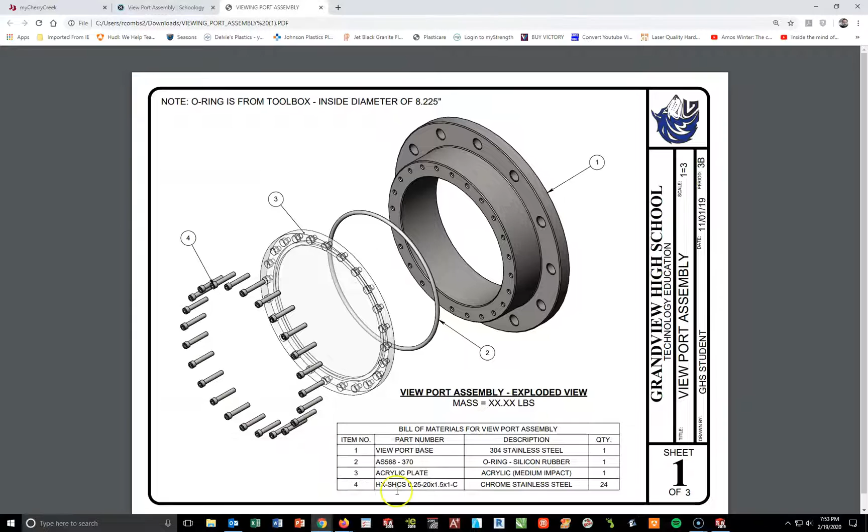Now the size of this, according to our drawing, is going to be 1/4, so I'll show that here. I look down here into this part right here, so it's 0.25 is 1/4-20. It's going to be 1.5 inches long with 1 inch of threading. The C is for our cosmetic thread.

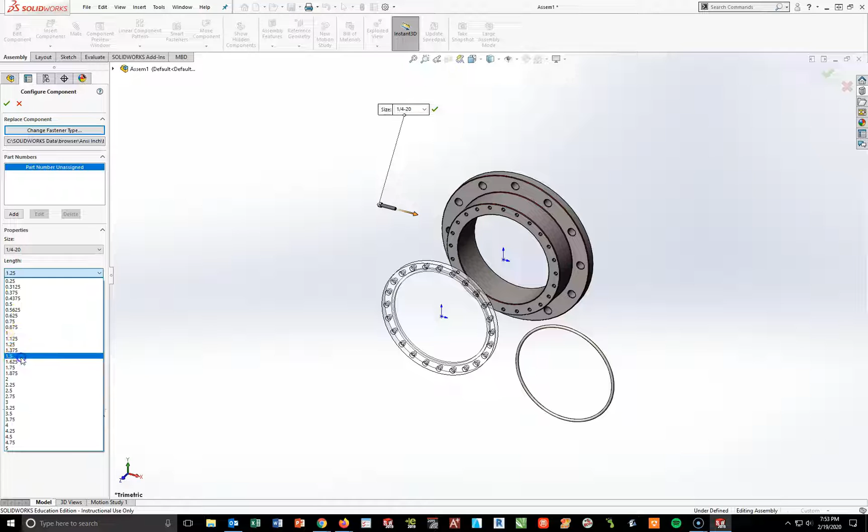Okay, so I'm going to go back to SOLIDWORKS. I'm going to do 1/4-20 by 1.5 inches long, and the thread length will be 1 inch long, and I'm going to use cosmetic threading. All cosmetic threading does is make it look like it is a screw.

At this point, I'm going to hit my check mark and call it good, then hit escape. I'm not bringing 24 of these in—we're going to pattern this in just a second. I'm going to show you what's called component patterning. Do not bring in 24 and have to do 48 different mates; you're going to make a mistake somewhere.

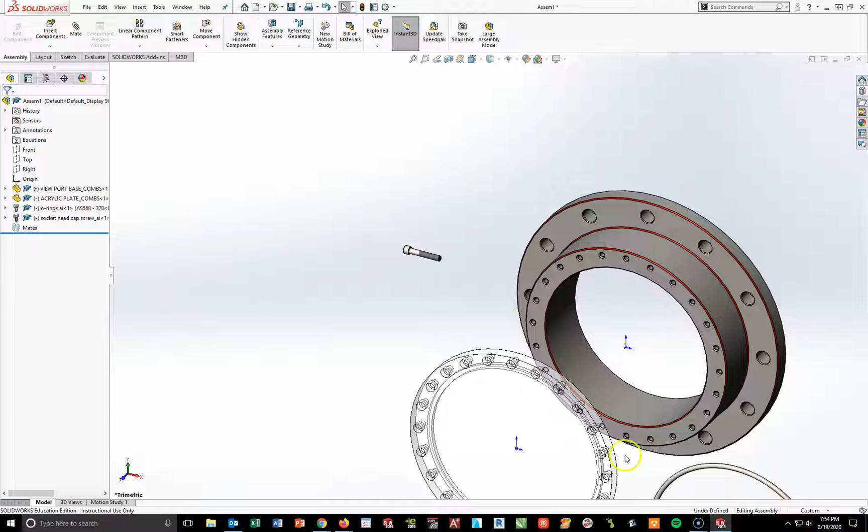Now what I want to do is start getting this mated together. To do this, I've got a couple things I need to get to work here. I'm going to try my mate. I'll hit my O-ring and go ahead and hit the inside of this channel, and what it's going to give me is a tangent mate, which is fine.

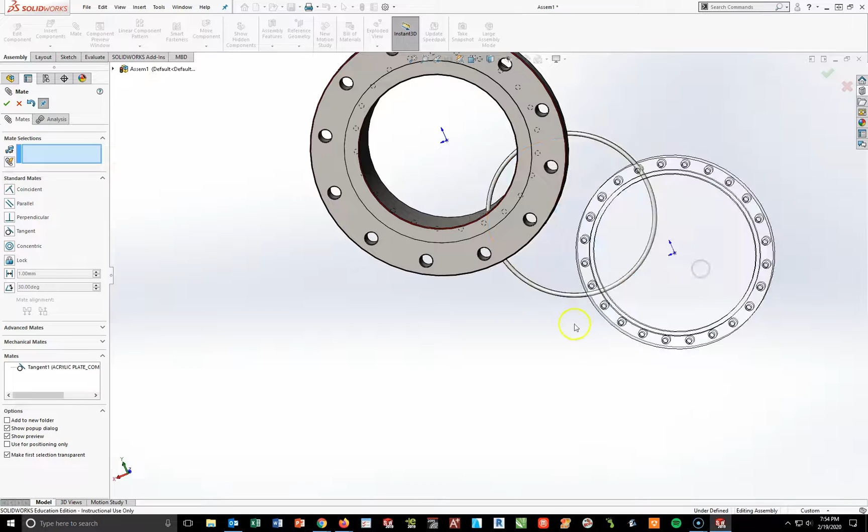I can try either way, it doesn't matter. I'm going to go this way, and that gets it at least to where it's sitting in that pocket. But the problem now is it's still not quite in the right spot. I could try to eyeball it in there, but if I move anything, it's not going to get there.

Okay, so I've got to actually mate this with planes. If you look carefully, this is sitting in the channel, and that's great, but the problem I have is I've got to get this in the right position. So I'm going to have to use my planes with my flyout menu here.

I'm going to go to the acrylic plate and expand it, and take the top plane of the acrylic plate here. I'm going to go to the O-ring and expand it, and take the top plane—in this case, not. I'm going to take the front plane and lock those two together. So now at least it's sitting centered. I'm going to hit my check mark.

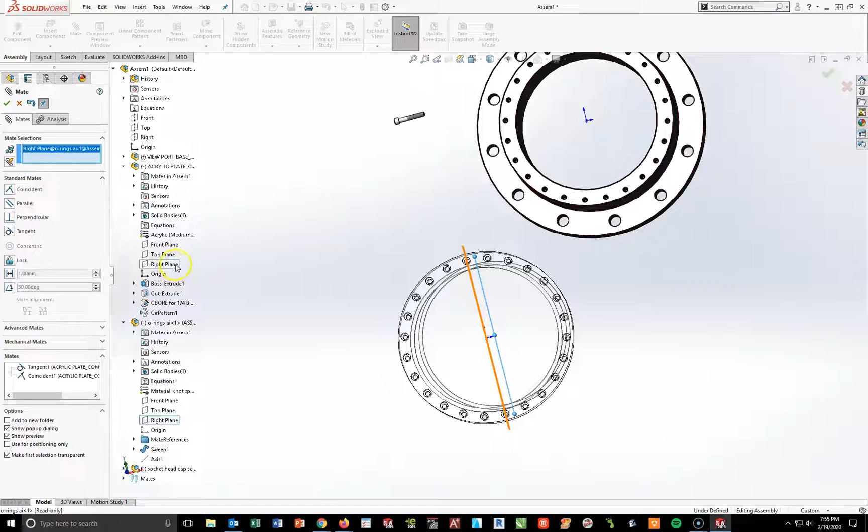And then I'm going to take the right plane of my O-ring and my acrylic plate. I'm going to find a matching plane, in this case my right plane of my acrylic plate. And now I have this perfectly set inside. So now my O-ring is sitting perfectly in that groove—at least I think it is. Maybe it's not, I can't tell which way. Yeah, it is, it's sitting right in that groove, right where it's supposed to be.

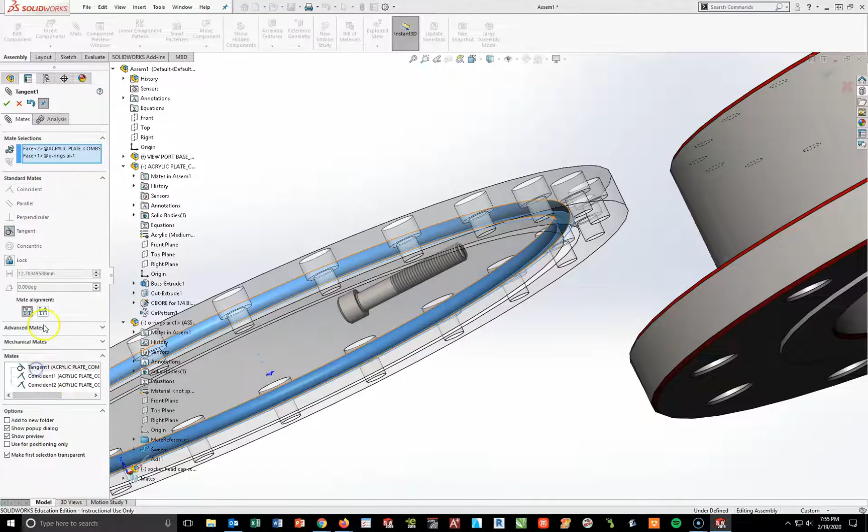Actually, it's not, I'm on the wrong side. So I'm going to go back to this tangent real quick and flip that over. Is that in the right position? There we go, so I went back and did the alignment here. Now it should be sitting in the right position, which is in that groove right there. This is why it's hard to work with acrylic, because it's hard to see where this is actually sitting.

Now, one of the things I want to tell you is if you go back to the drawing, we still have to add material to this, because this O-ring right now is silicone rubber. But if you go back to SOLIDWORKS and look at the O-ring over here to your left, there is no material on it. Now you need to change this, because this will throw your mass off. Same with our socket head cap screw—it's chrome stainless steel. If you don't add material on here, it will change this significantly by a pound or two.

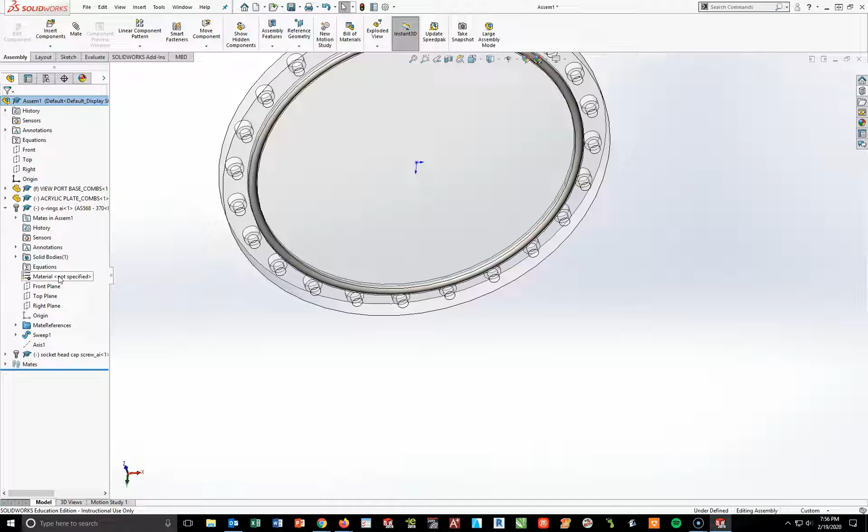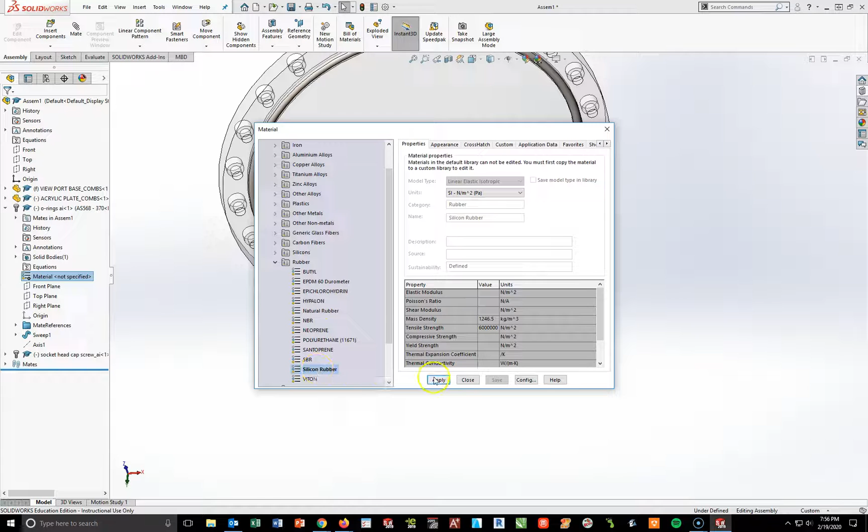So I'm going to go in here to Material Not Specified and right click, Edit Material. Now in this case, silicon is under Rubber, and it's silicon rubber. Okay, right there—apply and close. So it turns more like a black. Looks good. All right, now with that, I'm going to go ahead and close this.

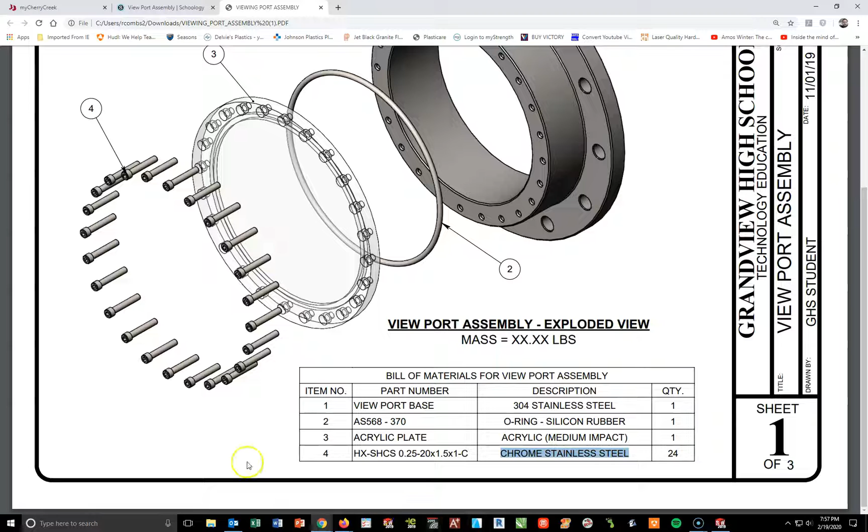I'm going to open up my socket head cap screw, because if you look again at the drawing—and again, this is commonly forgotten about—we are given this material of chrome stainless steel, so we have to add that on there. So I've got to go back into SOLIDWORKS here, expand this out, and where it says Material Not Specified, right click, Edit Material, go to my steel, and we're looking for chrome stainless steel. Apply and close.

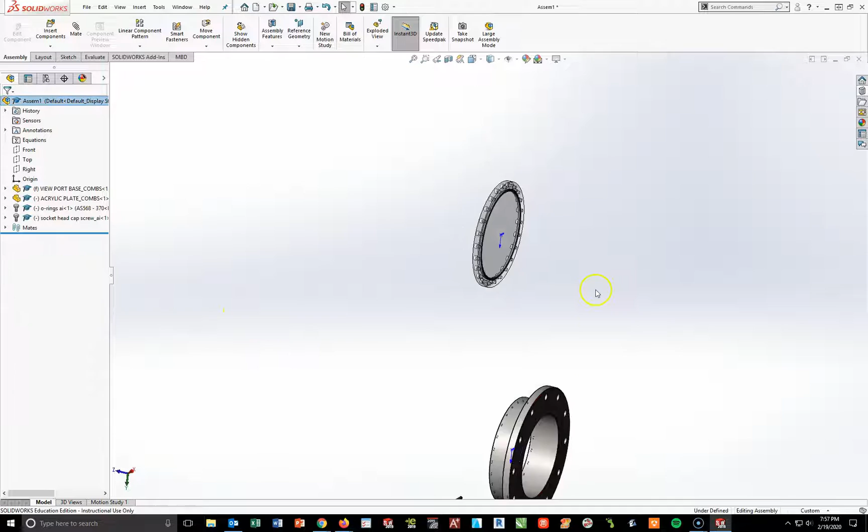Okay, now at this point I have all my pieces in place. What I'm going to do now is start lining up my holes. I'm going to take my mate tool, take the inside of that hole there, and line it up to the inside of this hole here. That gives me that part.

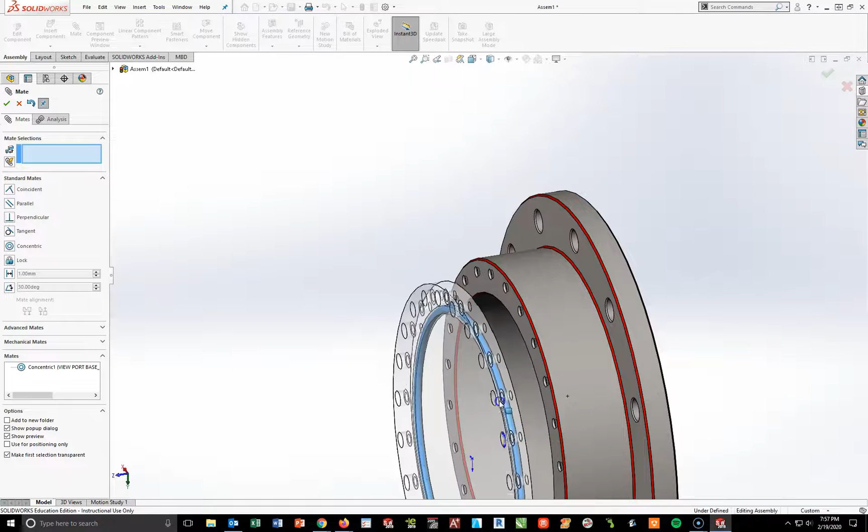Now this is kind of the hard part to play with. You got to see that's rotating around. So what I'm going to do next, and really I guess I could do this correctly, I don't know if I can make this work or not. Maybe I'll take that edge there and this edge here and make them concentric. That may actually be the faster way to go, because now, yep, everything's lined up.

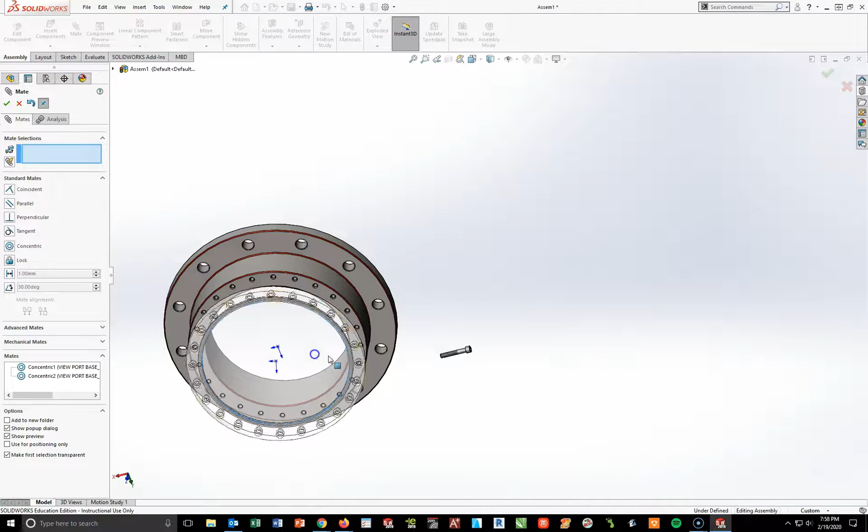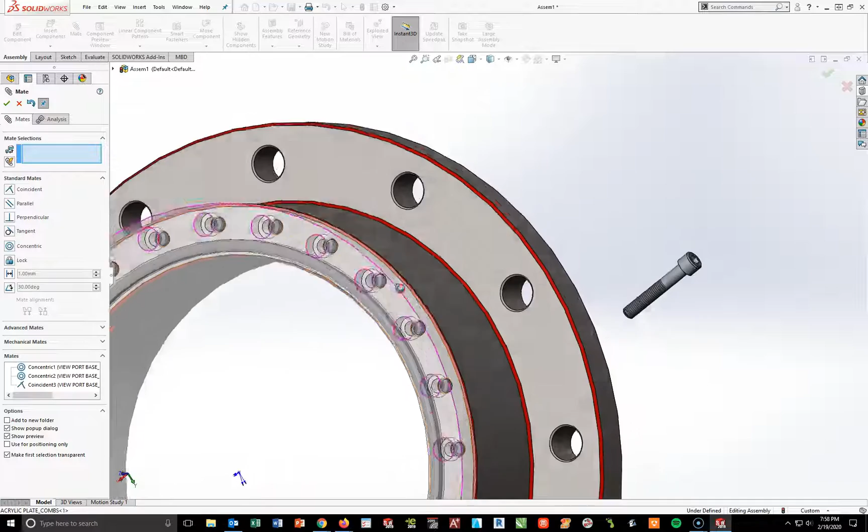Now what I'm going to do, and this is the hard piece, is trying to get this face right there. This is why sometimes acrylic's really hard, and sometimes I'll go back and change the material to a darker color so I can see it. At this point, I'm going to hit this face here, and now my acrylic plate is pressed up against the metal with the O-ring squeezed in between. So now hopefully it won't leak water.

Okay, from here all I'm going to do is go into my isometric view. I'm going to take this shaft of this screw and throw it inside the inside of that hole there. Oh, actually hit the face - see, that's the unfortunate part. So undo that. I'm going to take that right there and actually go inside that hole there. Okay, and I'm going to flip this by flipping that around.

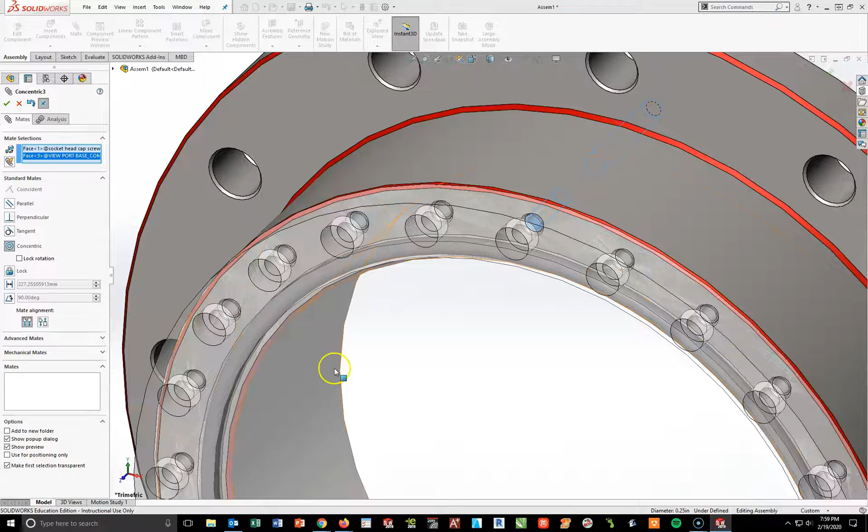Actually, I'm going to undo that one more time. I don't like that. So I'm going to go one more time here, and see if I can get this to line up in one of these spots. All right, I guess I'll go there.

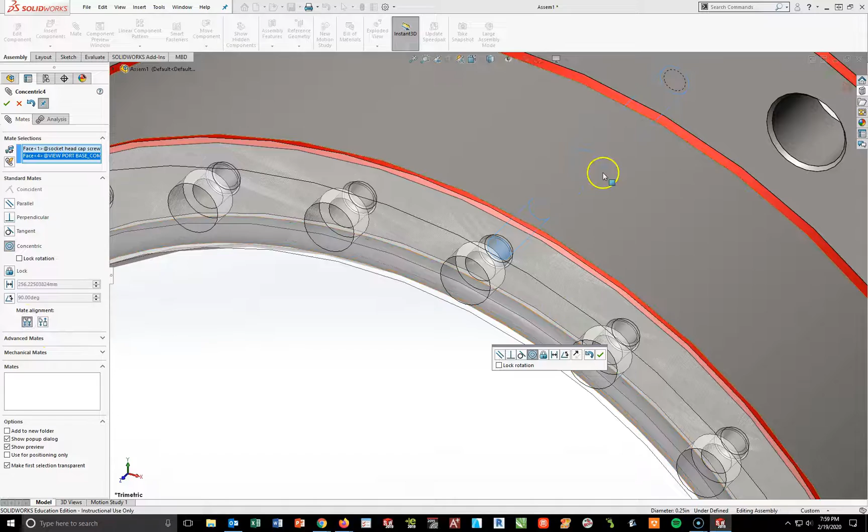Okay, and then I'm going to flip it, and then I'm going to have to somehow reach inside there. And this is the problem. There we go. I'm going to have to drag - let's go ahead and check mark this - but I'm going to have to drag this out the back. Sorry. Okay, now that's almost done.

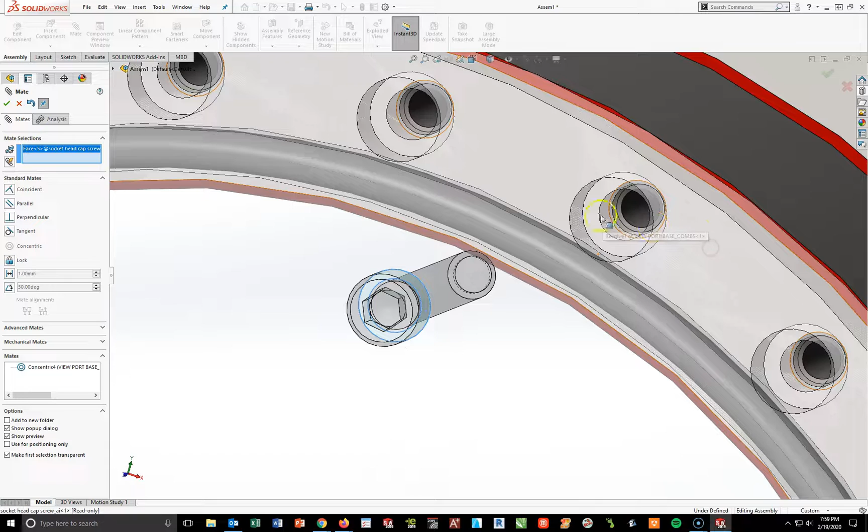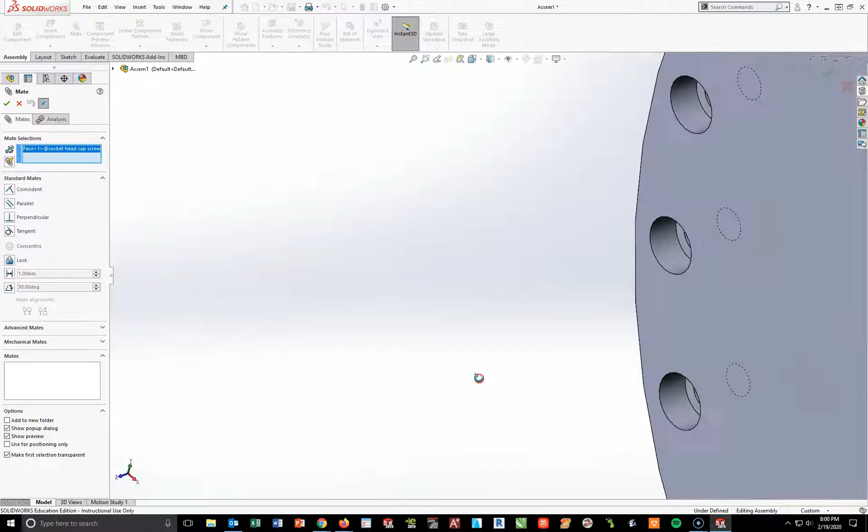Now here's the hard part. I need this face right here to be flush with the bottom of this face. Now this is where it gets hard, because in this case right now it won't work. So what I'm going to have to do is go to my acrylic plate for a second, right click and say remove material just for a second here. I'm going to make it dark so it's not see-through. And now I'm going to come back and mate this with this face here and that bottom face right there.

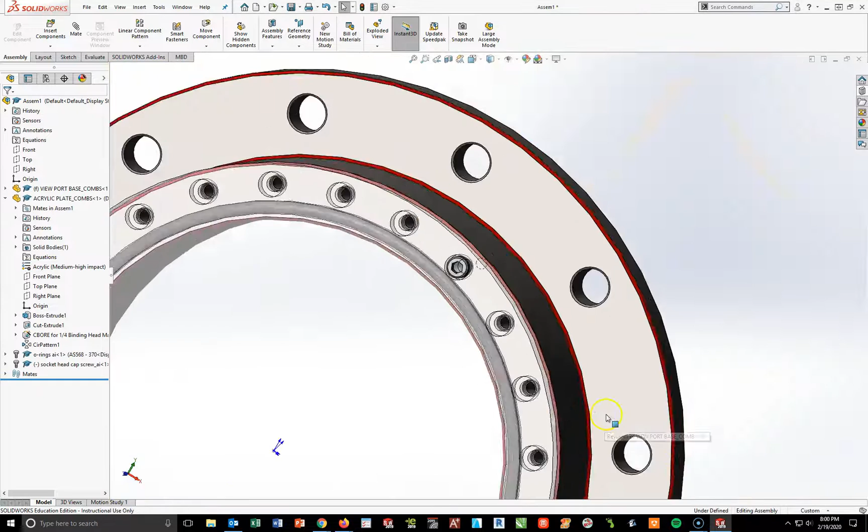So now I've got my screw in there. Check mark - I only need one, but I'm going to come back to my acrylic plate now, right click and edit. We're going to go back to plastics, and I'm going to put the acrylic back on, apply and close. Sometimes you have to take the material off to make this work.

Okay, so I've got this one in here, but I need 24 of these. And I don't want to play the game of having to mate them twice, for 24 times 2, 48 total mates. So what I'm going to do instead is go to linear component pattern under my assembly tab - we are going to do a circular component pattern instead. Now to make this work I have to have an axis, so I got to come back to the magic eye here and turn on my temporary axes. I'm going to highlight this first box and pick that axis in the middle. Now I want 360 degrees, equal spacing, and I'd like 24 of these screws.

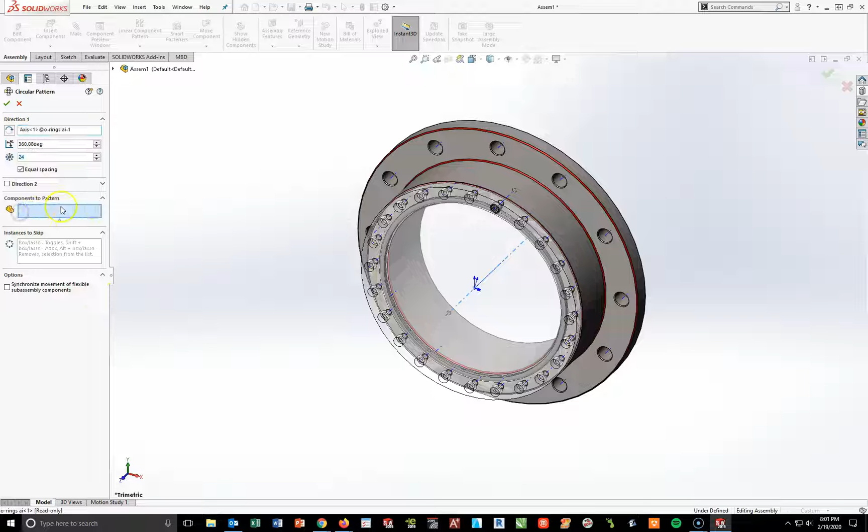So the component I want to pattern is simply this screw right here. You'll see there are 24 screws in the hole. Hit your check mark, and now you've got everything you need to have this as a finished assembly.

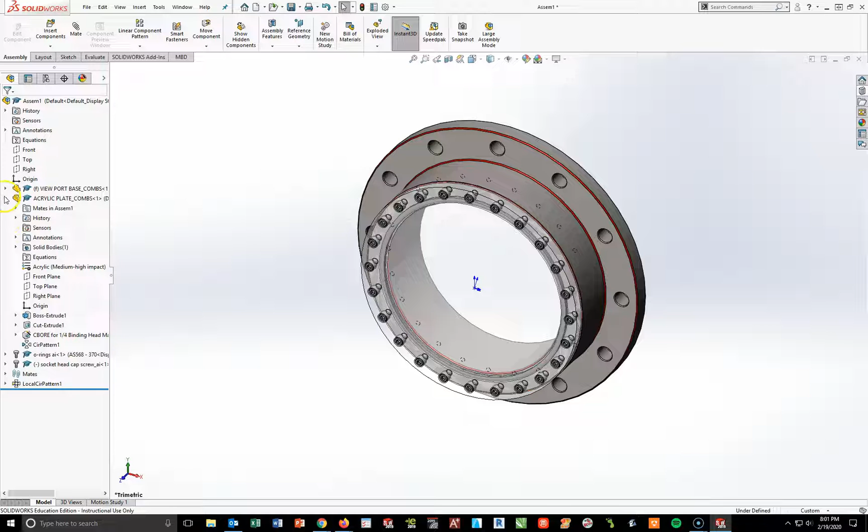I'm going to come back to the magic eye, turn off my temporary axes, and do a file save as. I'll call this my viewport, final viewport assembly, underscore my last name, and hit save.

Save all. Now if it's asking about the components, usually your screw, I'll do a save as, and just save it in the same spot as all my other pieces, so they're always together. I'll just hit save.

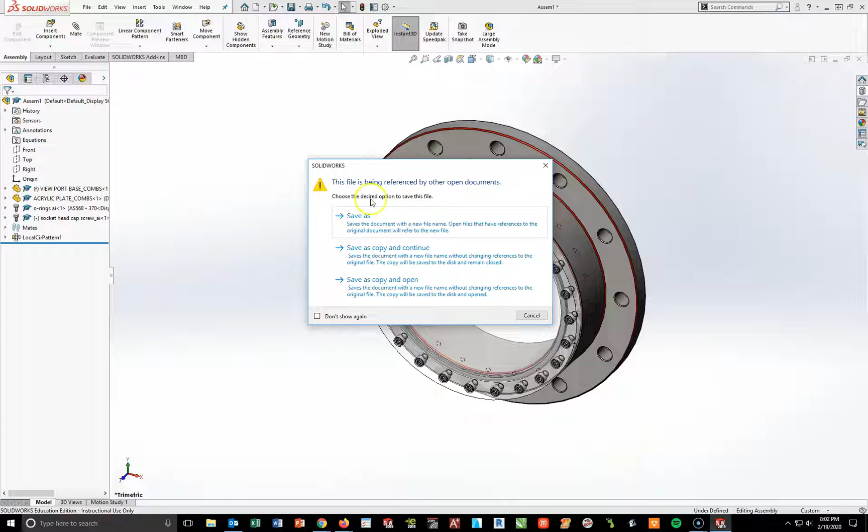Save as, O-ring, same thing. I'm going to put that in the same spot, so everything stays in the same file, so they're all together. That makes it safe so when I open it again, I don't have to start looking for parts.

Now I'm just going to do a real quick evaluate mass properties, and I see this thing weighs in grams. Now it shouldn't be in grams because we're doing inches. So I need to come up here to my options button, use custom settings, and change it from grams to pounds, and say OK. So I have it at 35.82 pounds.

At this point, go ahead and print your mass properties. Go collect it from the printer and bring it back to your table. And when you have that, go ahead and close out your mass property page.

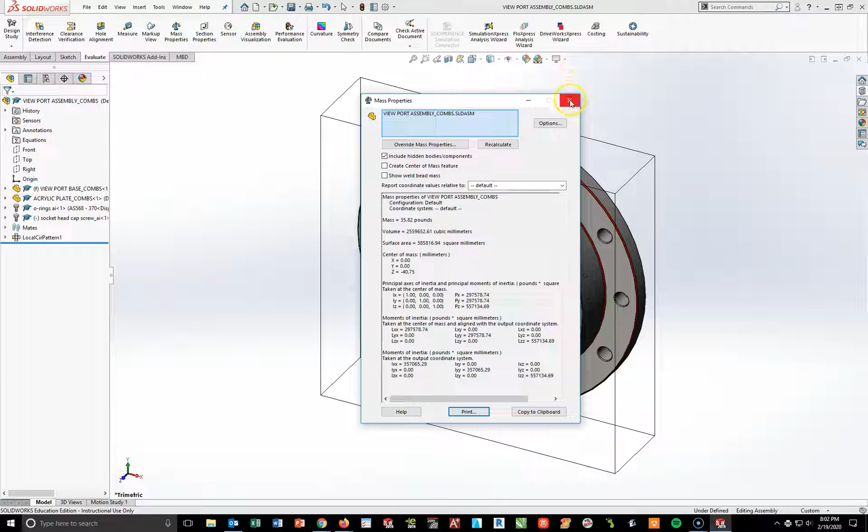Now from here, we're going to go ahead and do an exploded view. So under my assembly, I'll come in here and do my exploded view. What I'm going to do here is use my pullout. It makes it a lot easier if I left click on the first one here and hold my shift key and highlight all 24 of these.

Let me try that one more time to show you. In my exploded view, if I highlight the first one and then shift key and come to the last one, you'll see it populates all 24 so I can pull them all out at the same time.

At this point, I'm going to pull these all out together, just eyeballing it kind of in place, and that looks pretty good.

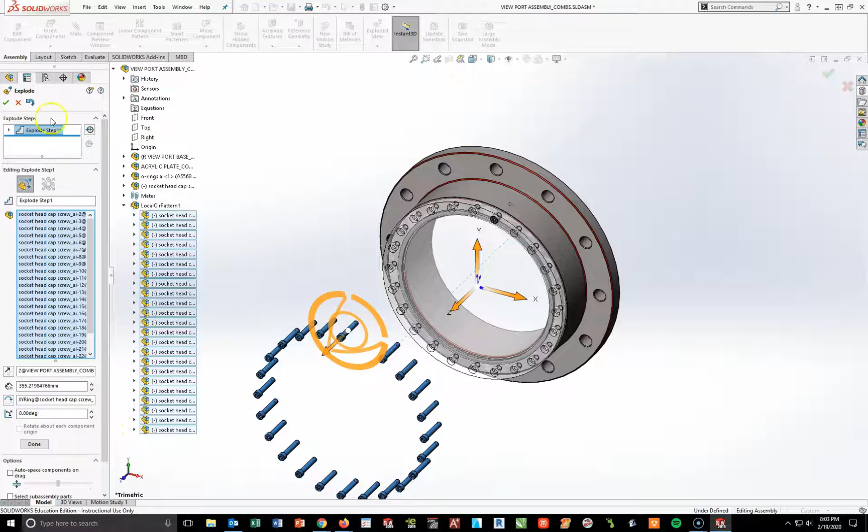Now remember, before you move on, don't end up missing one like I did here. Let me undo this real quick. I ended up missing this one here, so I just got to make sure I have them all in there. So I'm just going to grab that Z, pull this out a little bit, let go, and say done.

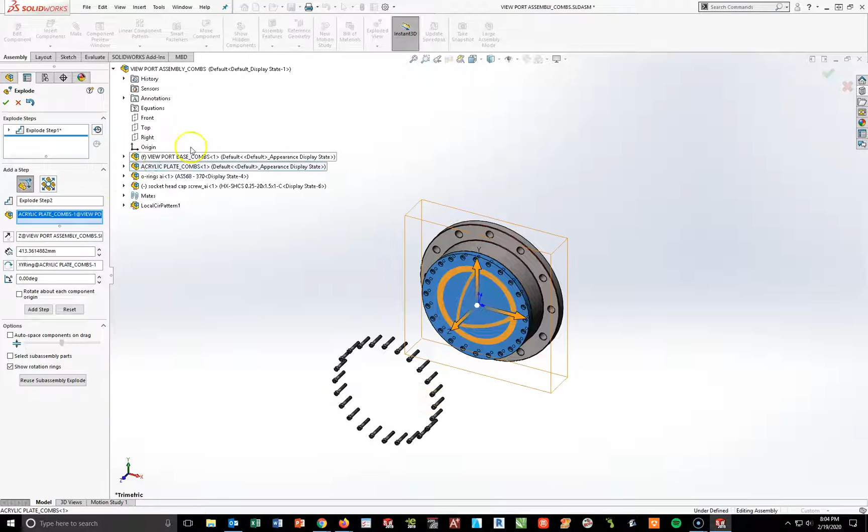Next thing I'm going to do is grab my acrylic plate. You can do it from your flyout. I'm going to pull this out to about halfway and hit done. Now I'm going to go to my O-ring right here, pull that out about halfway, let go, and say done.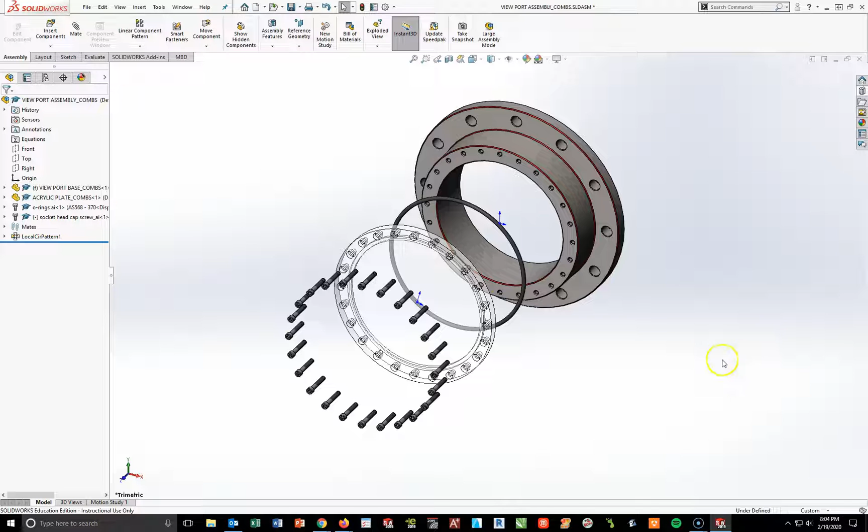Now again, it doesn't have to be perfect, it doesn't have to be exactly like mine. In this case, I am going to change this into a trimetric so you can see a little bit better. That looks pretty good. At this point, I'm going to hit save.

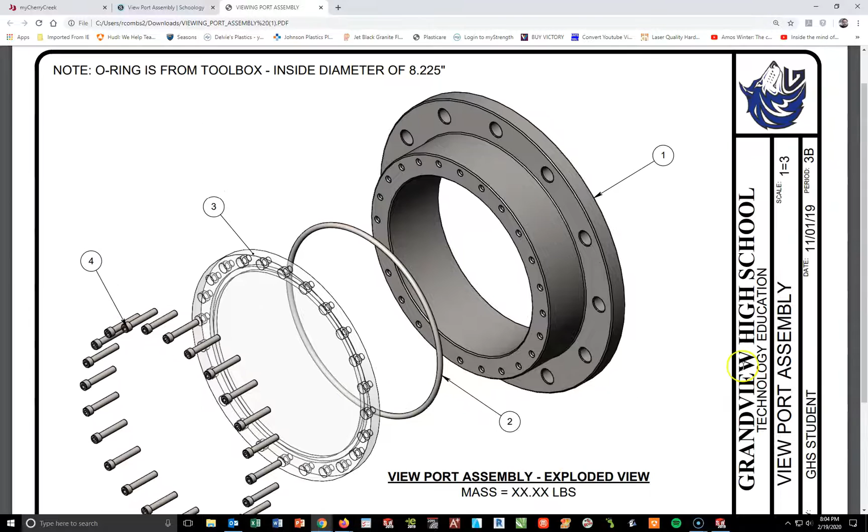So now all I have to do is put this view into a drawing. I'm going to get a GHSA inch, and we're just going to put our exploded view in, add our last little bits here, include the note at the top, and we're going to call this done, and this assignment is complete.

So go into SOLIDWORKS. I'm going to go to my GHSA inch. I'll do a file new, SOLIDWORKS templates, GHSA inch, and say OK.

Now from here, I'm just going to double click. I'm going to hit my isometric view. Actually, I'll do probably a trimetric view. Let's look at it real quickly.

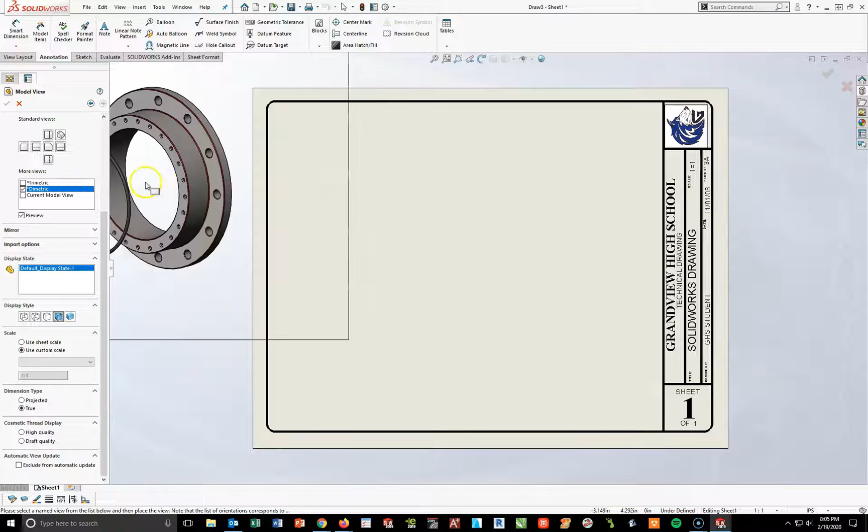I'll do it with some black lines. Scale on this will be 1 to 3. So I'm going to do a custom scale, user defined, 1 to 3, and bring this on out here. I'm actually going to go to a dimetric. That looks okay. Let's try an isometric. I'm going to go with the isometric. That looks pretty good right there.

Left click and hit my check mark and adjust. Okay, now at this point, I'm going to go ahead and start adding in those notes. That includes the one at the top. So I'm going to turn on my note tool.

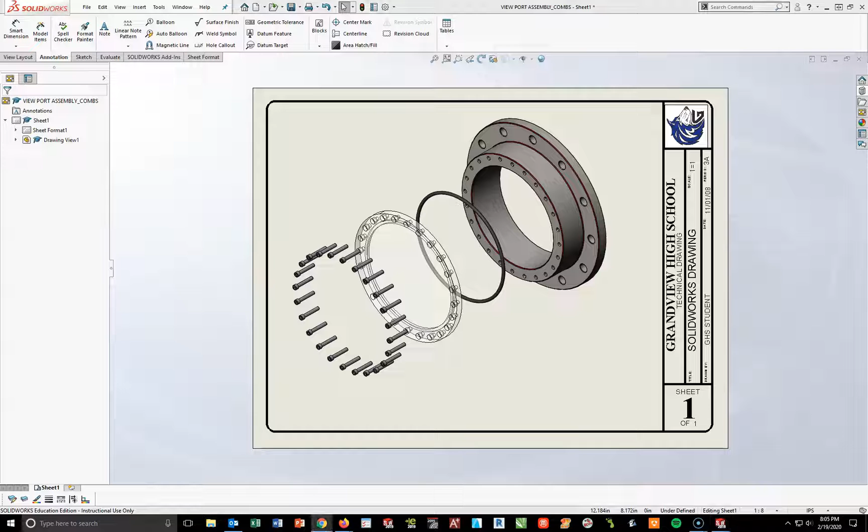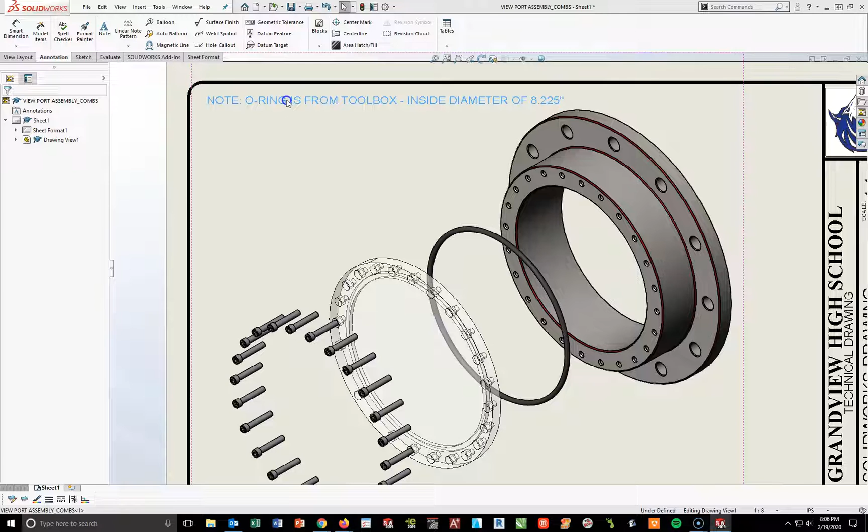Actually, I'm going to highlight this note over here, do a control copy, note tool, control V. I'm going to leave that left justified, font size 12. Whoop, I need to highlight all that, sorry. And make it a font size of 12. Click outside of it, put this up in the corner. I may have to lower this down just a little bit, push this back up.

Okay, that looks good. Coming down here, I'm going to go ahead and take that title below it, highlight that, control copy, add a note, put it underneath, and control V. Highlight, font size 12, highlight the top line, bold and underline, and then change this to its proper mass, which should be on your page, making sure I get the 2 decimal places and that it is in pounds. That is done.

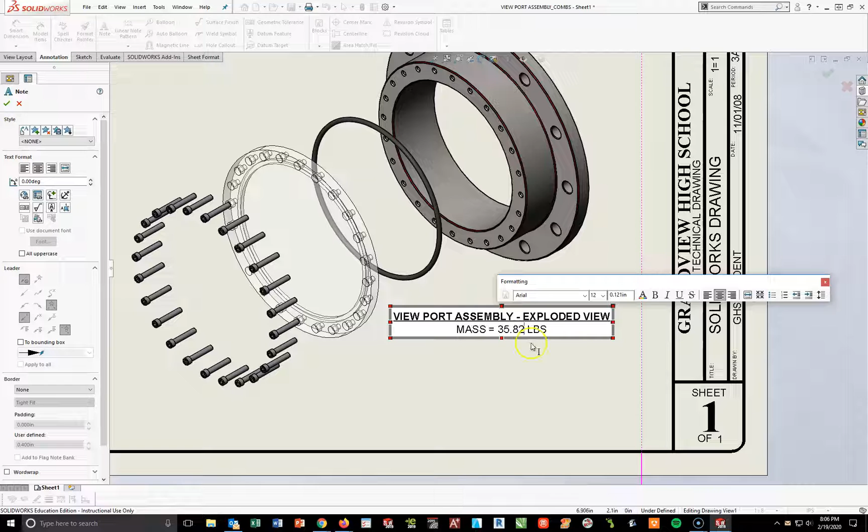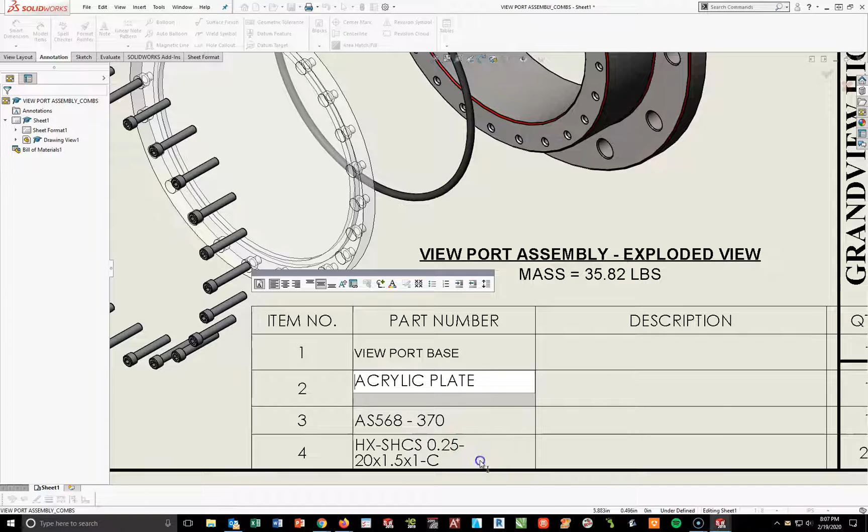Go to my tables, bill of materials. Okay, click inside here and hit your check mark. Drop your table below. Now I'm going to come in here and kind of clean each one of these pieces up by highlighting, get rid of my last name, just to give myself some space. I got to make this box a little bit smaller. I am going to extend this out a little bit, close this one down a little bit, take my descriptions.

Okay, and then at this point, I'm just going to kind of fill in this and then shrink everything down. So I'm just going to go and start double clicking some lines, really kind of tighten this all up to get it all to fit together.

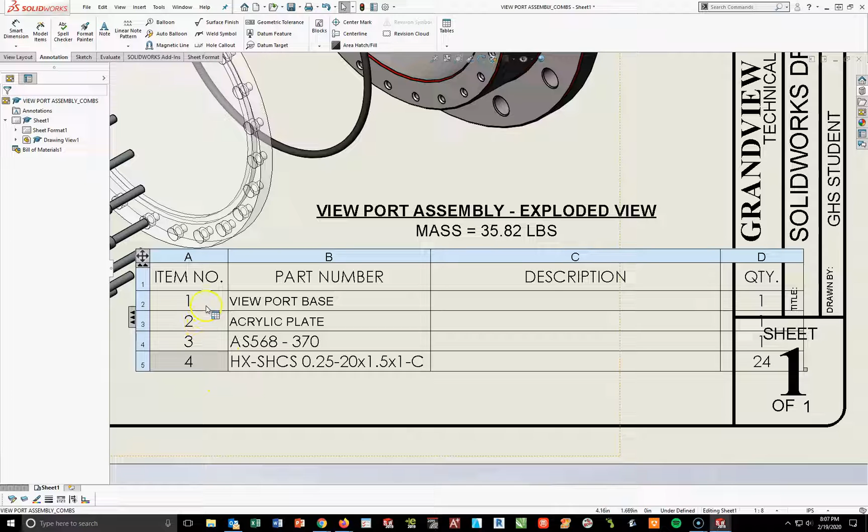Double click the description. First one, the viewport base is 304. I'm just going to put the stainless steel, even though I know it doesn't say that in the material list. Okay, the acrylic plate will be of acrylic. I'm going to call it medium high impact. Or I'm just going to do the medium impact. I want to save some space here.

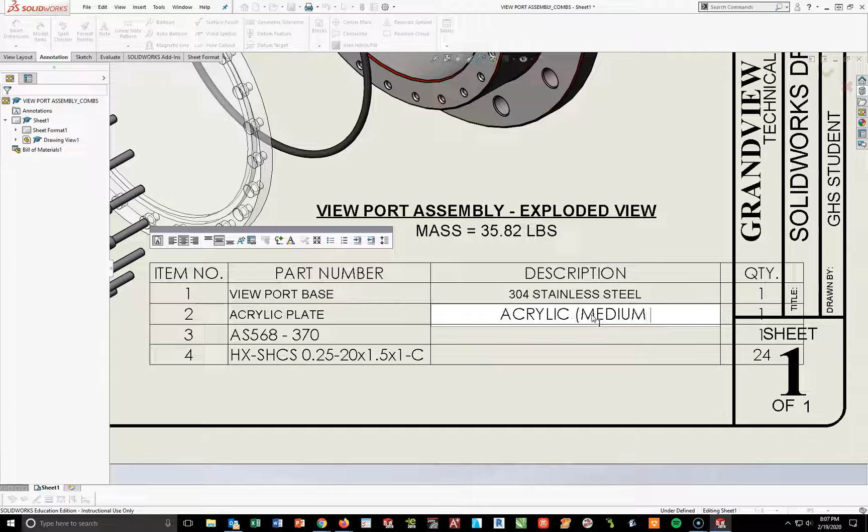Okay, this will be the O-ring. Silicone rubber. And this right here will be chrome stainless steel.

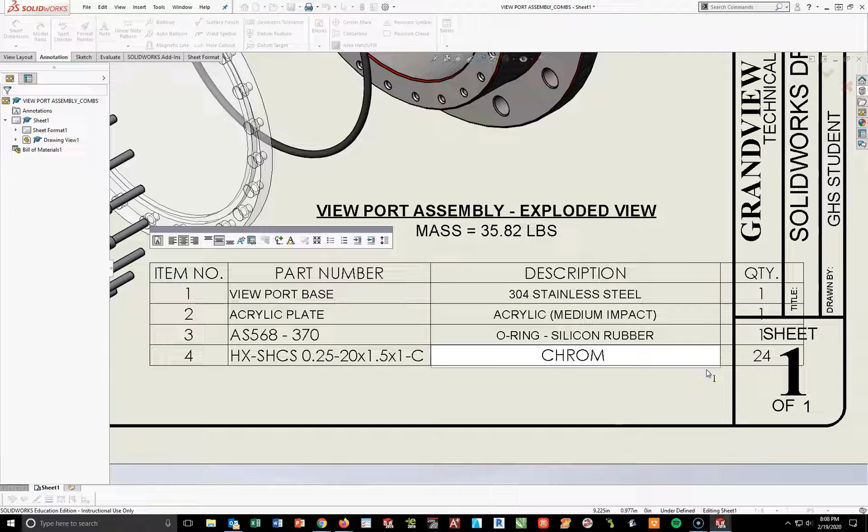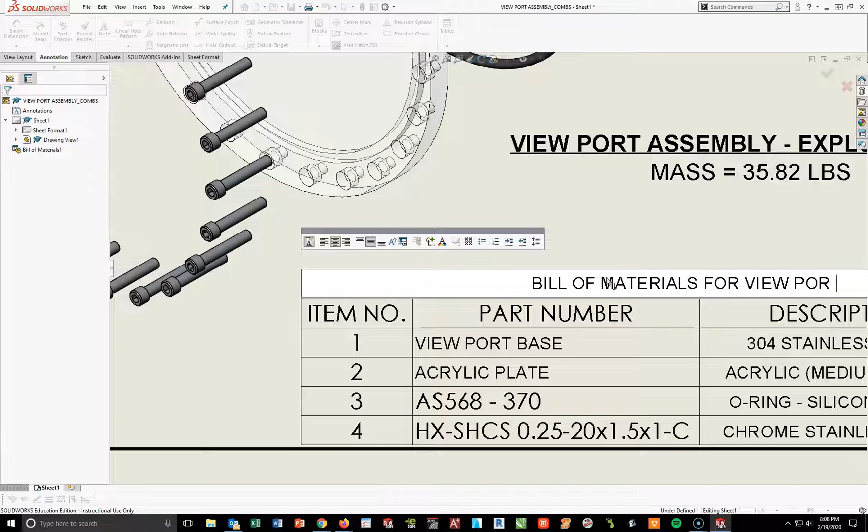All right, at that point, I'm going to shrink this box down a little bit tighter, shrink down the quantity a little bit tighter, bring this down a little bit lower in this corner, and finish by adding in a title at the top. Double click my BOM table, and we're going to call this Bill of Materials for Viewport Assembly. Okay, and at that point, I'm just going to make a small adjustment up, and that looks good right there.

All right, the last part of this, I'm just going to again make some small adjustments to this. Looks pretty good there. I'm going to turn on my balloons. I want them at circular, not tight fit. I want them at 2 characters. I'm going to click on each of the pieces. There's number 1. Here's number 2.

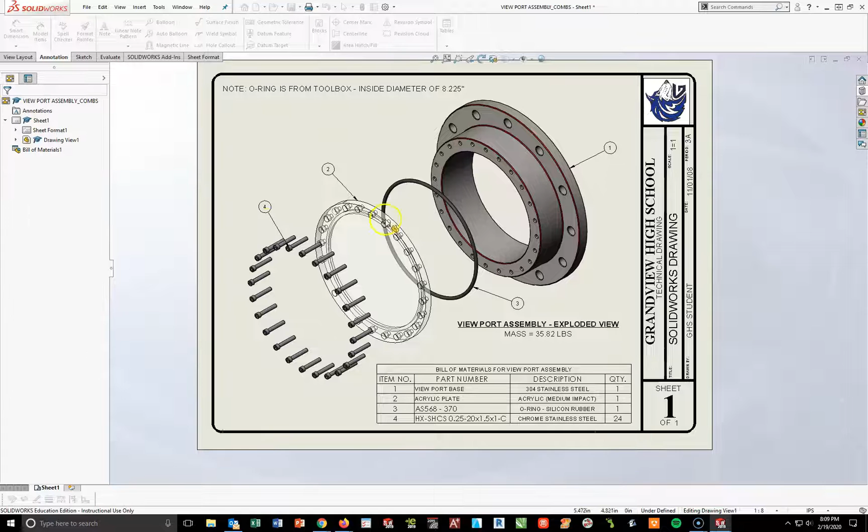Acrylic is number 3 - or no, excuse me, that's 2, that's 3. And then I'm just going to pick on 1 screw. I do not need to see 24 arrowheads. At this point, this part is done.

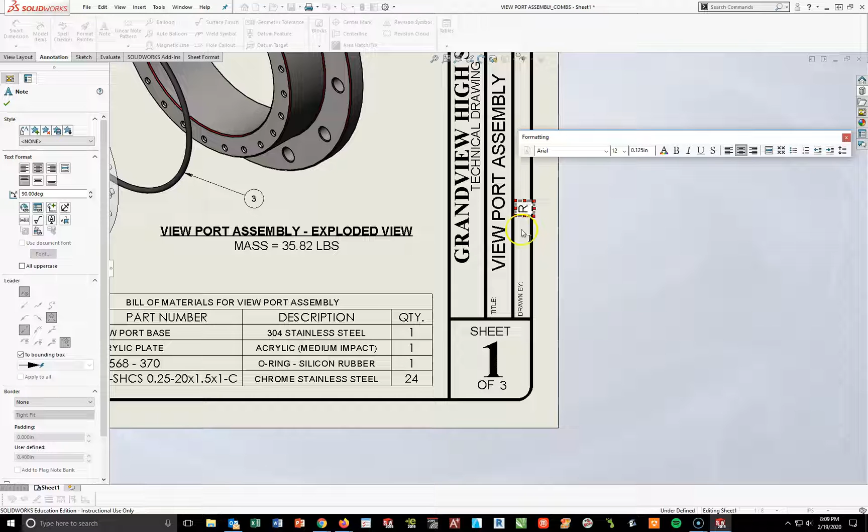I just need to change the title block. So this is 1 of 3. The title of this will be Viewport Assembly. First initial, last name. Today's date. And period, and scale as 1 to 3.

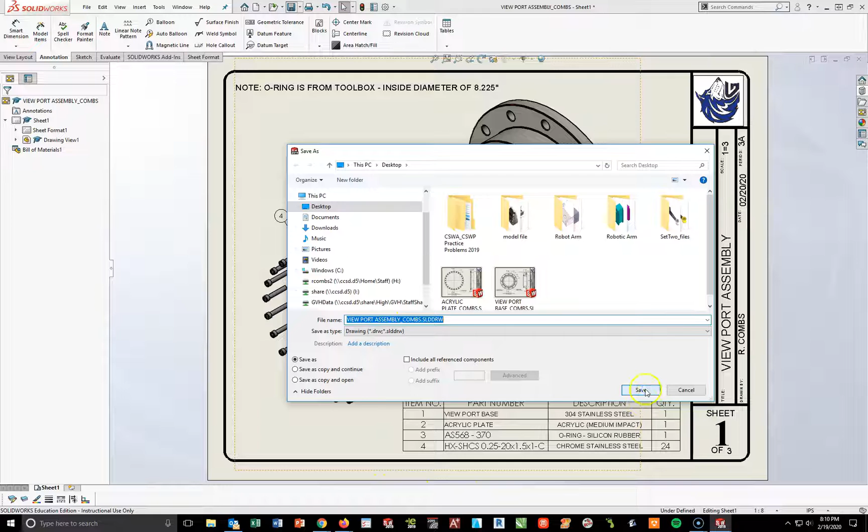So at this point, I'm going to save this drawing, save all, save it as a viewport final assembly, and hit save. And at this point, I want you to go ahead and print. Go ahead and go collect this from the printer, staple the mass properties to the back, and place this in the collection box. At this point, the viewport assembly drawings are done.